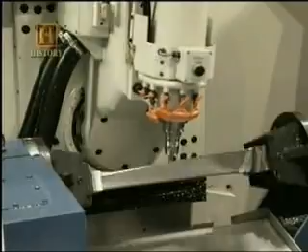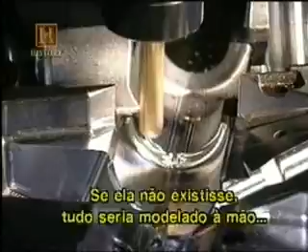It produces thousands of parts that go into the makeup of various items that we utilize every day. If there's no machine tool, everything would have to be shaped by hand, scraped, fitted, or filed into specific shape to fit into mating parts. All these inventions that came about in the late 19th, early 20th century might not have come about as easily as they did if it were not for machine tools.

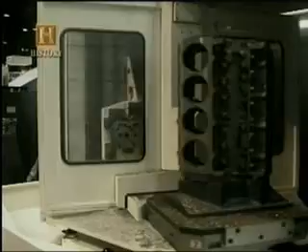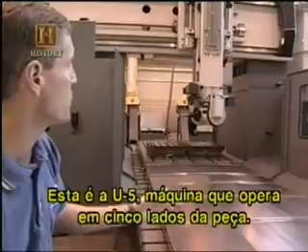What we do here in Cincinnati is we design, manufacture, and assemble all of our machine tools built in the United States. This particular machine is called the U5 because it can operate on 5 sides of a part. And these days, our customers, in trying to reduce setup, want to complete a part in one operation. Hence, they want to be able to operate on all 5 sides of the part. Typical customers of this kind of machine tool are tool and die manufacturers. The machine would come in and would actually shape the die, for example, in the shape of a door frame for a car.

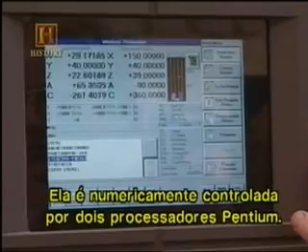There are 2 Pentium microprocessors running the computer that runs this computer numerical control machine. The computer directs all the operations of the machine tool. There might be up to 50,000 unique tool points all blended together in one motion. You can store literally hundreds of thousands of data points in a machine like this.

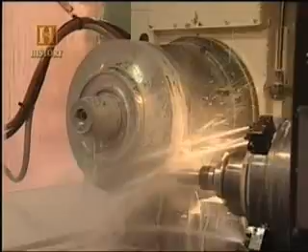It takes about 13 or 14 days straight just to mill this part. So this is probably as difficult as it gets.

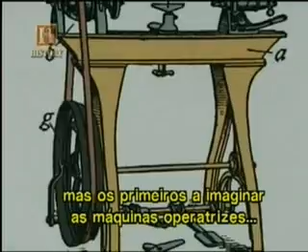We think that we are so far advanced today, and we are so clever and smart and have so much technology behind us, and yet the early people that devised the first machine tools really were very, very bright individuals. It was a by guess and by golly type of thing that eventually produced something of value. They didn't have the college degrees that are evident today, but by golly, they had a lot of ingenuity and they used it.

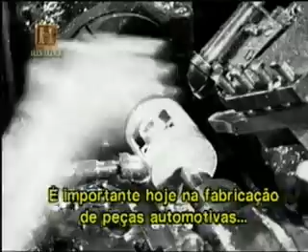The lathe is probably the most versatile machine and the most widely used of all the machine tools because so many things are cylindrical in nature, and its primary purpose is to cut metal down to a specific diameter. This is important if you're going to make an axle shaft, for instance, for a wagon so that the wagon wheel would fit on. It's important in the manufacture of any type of automobile parts, transmissions, engines. Virtually everything is basically cylindrical in nature, and this is turned on a lathe.

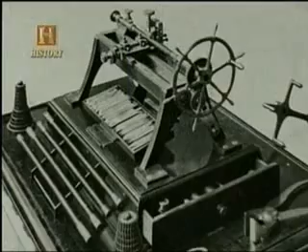He would put in essentially a pattern piece in the top of the machine, and the lathe would follow this pattern to create another identical gun stock in 20 to 25 minutes. It was this type of machining that they were going for, especially in the firearms industry, where you could pump out these pieces and then assemble them.

O torno sofreu algumas modificações, como as manivelas colocadas de um único lado para que os operadores não tivessem de se mover.

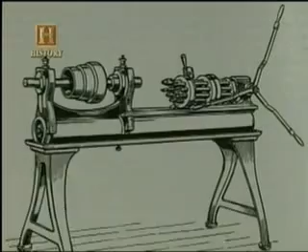Em 1845, Stephen Fitch, de Connecticut, criou o torno revólver, no qual várias ferramentas se revezam no processo de corte.

Em 1887, a R.K. LeBlond abriu uma filial em Cincinnati, cidade que ficaria famosa pela fabricação de máquinas operatrizes. Tempos depois, a LeBlond se tornou a maior fabricante de tornos do mundo.

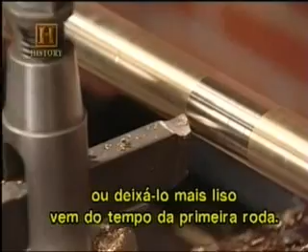This is a 1903 R.K. LeBlond lathe. It's manufactured here in Cincinnati. The lathe is the oldest form of all machine tools. The idea of actually turning an object to shape it into a round shape, or a smoother round shape, goes back millennia, even to the time of the first wheels.

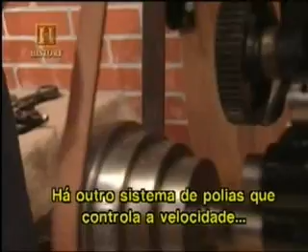Dois importantes aspectos do torno são a velocidade na qual a peça gira e a velocidade com que as ferramentas trabalham a peça. The speed of the lathe is controlled by the pulley size, which is set on the lathe itself. The smaller the pulley wheel that it's set on, the faster, the higher the RPMs. The larger, the slower. And there's another pulley wheel system which controls the feed rate, the rate that the tool moves either one direction or another on the stock that's being worked.

Mesmo com a passagem do vapor para o diesel e deste para a eletricidade, os tornos atuais se parecem muito com os modelos de 100 anos atrás. You can make a machine tool faster, you can make them more accurate, you can make them more precise, but the principles behind cutting, shaping, and finishing a piece of metal have remained the same.

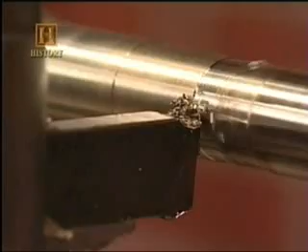Embora os princípios sejam os mesmos, o tamanho é diferente. O eixo de alguns tornos chega a ter 12 metros.

Em tempos de guerras mundiais, as máquinas operatrizes trabalharam a todo vapor. As far as the R.K. LeBlond Company is concerned, they had a tremendous role in World War I and World War II. They produced what we call a gun boring lathe for the various artillery pieces that were used throughout the war, the big howitzers.

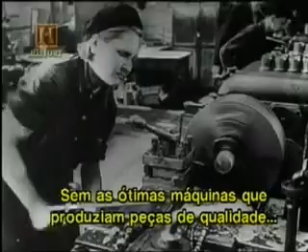Há quem pense que a América não teria vencido a Segunda Guerra sem as operatrizes. Without the quality of machines that we had, which produced quality parts, we never could have provided the war material for England, France, and the Australians, the Canadians. They all used American equipment. I think they made the difference between our winning the war or possibly losing the war. If we had not been able to supply virtually the rest of the world with the necessary war material, we might be saluting the Nazi flag today.

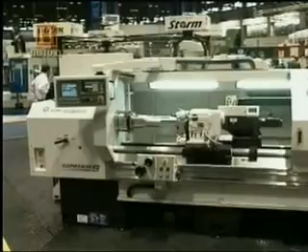Nos anos 60, os tornos ganharam a ajuda do computador e se transformaram nos centros mecânicos de hoje. Most modern turning machines are computer controlled. You have originally spindle speeds of 3,000 to 4,000 RPM. Now you're talking 20,000 to 30,000 RPM. Almost all the things that rely on motion from electric motors involve parts that spin, and most of those parts are produced on lathes and turning machines.

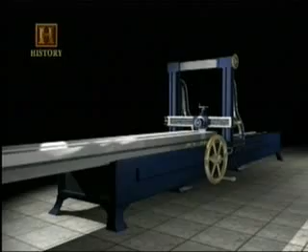Os tornos não foram criados isoladamente, já que outras operatrizes surgiram ao mesmo tempo. A plaina mecânica, por exemplo, foi uma das mais importantes operatrizes do seu tempo. Comparada à plaina de madeira, esta máquina serve para desbastar superfícies de metal. Há modelos em que a peça se move sob a ferramenta e outros em que a ferramenta se move sobre a peça.

Atribui-se a invenção da plaina mecânica em 1814 a James Fox, um mordomo que virou torneiro. Um dos modelos mais antigos se encontra na cidade de Windsor, Vermont, no museu que abriga a maior coleção de máquinas operatrizes do mundo.

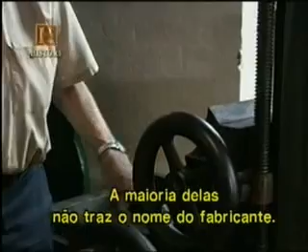Ed Battison é o fundador. Most of the early machine tools have no maker's name on them. They were made by the people that needed them rather than the people that were making a market out of selling them. We have an iron planer. It's operated entirely by hand, and it was made with a file. It was cast to rough shape and then filed up. You would make all the shapes you can't make on a lathe.

James Nasmyth era um inglês que trabalhava para Henry Maudslay, o inventor do torno de corte.

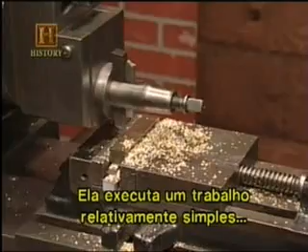This is a shaper from the American Tool Works, built in 1906 right here in Cincinnati. The shaper does a real basic type of job for people. It basically shapes a piece of stock. It goes through an enormous amount of movement just to perform this simple task, though.

Shapers can eliminate simple filing. It can also make keyways or notches for fitted pieces. As the stock is moved left or right, the cutting tool is moved back and forth. When the cutting tool moves to the home position or to the rear, the table moves over gradually, and then the cutting tool moves forward again and takes another bite off of the stock itself.

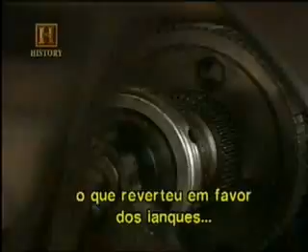After the Revolutionary War, a lot of the technology was banned from the United States in the same way that we have embargoes against Cuba or people would like embargoes against China today. If the political situation had changed, then the technology would have come in very freely. We were the up-and-coming Yankees. England often looked down upon the United States in the types of machines that they produced, that they were inferior. They weren't of the quality of the British machines. And in some respects, that's very true. We didn't produce the types of these large, sturdy machine tools that the British did, but in many respects that worked in our favor because the machine tool industry changed so rapidly in the 19th century that we could afford to build a little cheaper machines. Within 10 to 20 years, they were onto something new and different, and those machines were replaced. Whereas I think in many instances the British stayed with their old reliable machines, and we surpassed them.

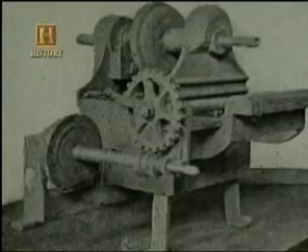I don't think they worried too much about whether somebody stole a patent or not, simply because communications aren't what they are today. I think that there is a tremendous amount of adaptation from one builder to another.

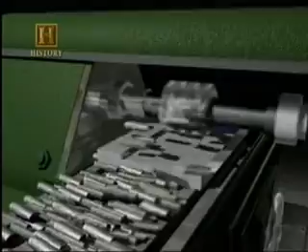The milling machine is pretty much the brains of the machine tool shop. It's used for making precise cuts. This one is a horizontal mill, or what's sometimes referred to as a slab mill. You can adjust the stock that you're working on any axis. This table is moving the stock against the rotating, sharpened steel tool. The steel tool basically chips away or scrapes away small particles of the metal. Any slab of metal that needed to be milled off to a uniform height would be milled on a horizontal mill like this.

Em 1878, a companhia Cincinnati Screw and Tap fabricou a primeira retífica de fresas e pouco depois se tornou a maior fabricante do mundo. A really big break for the company came just about the turn of the century with the advent of manufacturers of bicycles. And the bicycle parts, of course, are made of metal. And there was a need in the growing bicycle industry to have milling machines to make the components for bicycles.

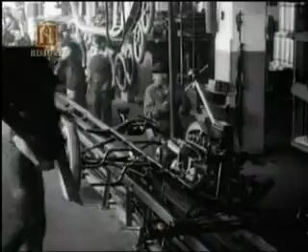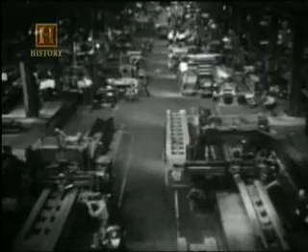The production of airplanes, or the production of jeeps, or the production of personnel carriers, or the production of tanks, or even the production of guns and arms, is all dependent on metal parts, mass-produced metal parts.

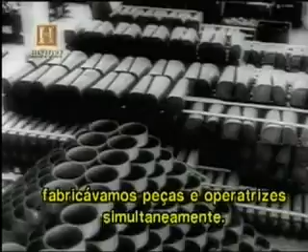In World War I, Cincinnati was very busy making basic machine tools, and we were making them for the factories that made war goods. In World War II, we were also extremely busy here making those same machine tools to support not just the U.S., but also the Allies during that period of time. And we were actually making components, portions of tanks, portions of personnel carriers, in the factory at the same time we were making machine tools.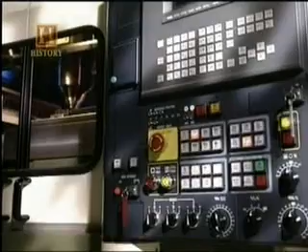Em poucas décadas, esta máquina alcançou níveis de precisão e força nunca antes imaginados. E evoluiu até chegar aos modernos centros mecânicos que executam múltiplas funções em uma única peça.

The precision with which you can make metal parts that fit together in a tight fashion is solely dependent on the precision accuracy capabilities of the machine tool that you use to make those parts. The more accurate the machine tool is, the more precisely you can control the dimensions of parts that ultimately mate together in an engine or in an aircraft or whatever the case may be.

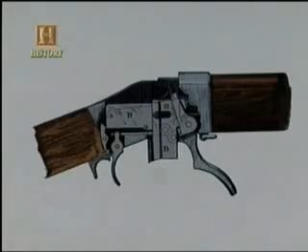Precisão e permutabilidade são conceitos bem definidos hoje. Mas antes da retífica de fresas, partes supostamente idênticas sempre apresentavam diferenças. O operador tinha de lixar as peças para formar um par. Mas Eli Whitney afirmava que sua máquina era tão precisa que as peças de uma arma poderiam ser trocadas por peças de outra. O conceito foi batizado de peças intercambiáveis.

E Thomas Jefferson aceitou a afirmação após examinar 10 fechos, embora muitos ainda achem que Whitney exagerou na permutabilidade das peças. They were terrible. Jefferson was an enthusiastic amateur, but there's a lot of things he didn't know.

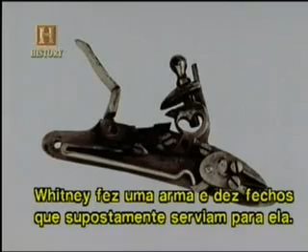And one thing he didn't know about was interchangeability. Whitney made one gun and 10 locks that supposedly would fit it. Well, that's easy enough to do if you spend time enough and money enough to do it, and he saved the contract that way. He fooled Jefferson and the War Department.

Mas o conceito de peças intercambiáveis chegou para ficar. Logo, muitos fabricantes de armas como Robbins e Lawrence, Springfield e Colt aceitaram a ideia.

A retífica de fresas trouxe uma nova precisão para os produtos criados. Mas não foi um feito exclusivo, já que outras 4 operatrizes tiveram um papel igualmente importante.

A perfuração é uma prática muito antiga e sua ferramenta mais rudimentar é o trado, bastante conhecido pelos escoteiros. Um dos primeiros avanços na perfuração surgiu com a broca de ponta torcida, que retirava as raspas do buraco.

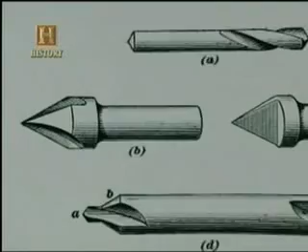A perfuratriz de Blacksmith foi um dos primeiros modelos contemporâneos. This is the post drill, and as with any tool, it eliminates a lot of work from your task.

Instead of having to push down on a drill that you might have had to push down with your shoulder and get maybe an inaccurate hole, the post drill mounts firmly and securely on a post in a shop, and then the power is kept constant when you're turning it by the flywheel.

Do volante manual à correia a vapor foi um passo. E logo todas as lojas vendiam a perfuratriz mecânica, o 4º tipo de máquina operatriz.

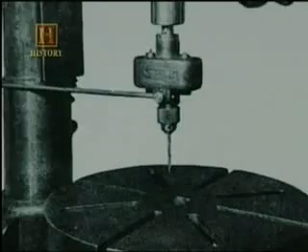Os avanços não se resumiam apenas na área mecânica, mas também no metal com que as brocas eram fabricadas. Apesar de rígido, o primeiro aço de ferro e carbono era quebradiço.

Em 1751, após a invenção do aço de cadinho, cuja liga é feita em uma caldeira fechada, as brocas ganharam resistência e perfuravam metais mais rígidos.

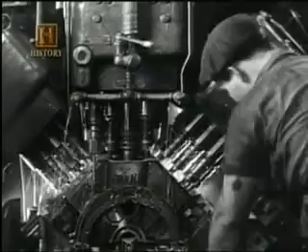No início do século XX, as perfuratrizes eram utilizadas na fabricação de máquinas de costura, bicicletas e relógios. As máquinas que faziam mais de 30 furos de uma vez eram utilizadas para fabricar motores.

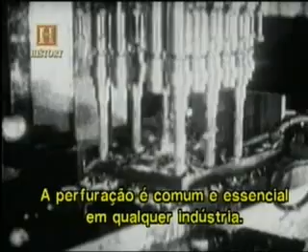Hole making happens to be the most common metalworking operation in industry. We make a lot of holes. Drilling machines come in all kinds of sizes because we make small holes, we make very large holes. Hole making is just so common that it's essential to manufacturing in almost every industry.

I think some of the most impressive drilling machines today are those designed for high-speed hole making. Typically, these drill at speeds that you can hardly see the hole making process. It's so fast. Certain workpieces require hundreds, even thousands of holes. So the faster those holes can be made, the more efficient the drilling machine has to be.

Os avanços do século XIX resultaram em melhores perfuratrizes e um novo tipo de operatriz, o esmeril. No século XVI, Leonardo da Vinci desenhou esboços de um amolador rudimentar. Por centenas de anos, o homem usou formas parecidas para afiar suas ferramentas.

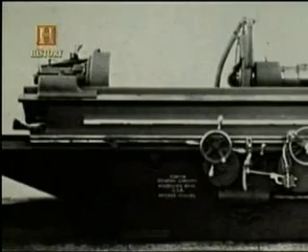Em 1837, James Nasmyth, o mesmo que inventou a plaina, patenteou o primeiro esmeril. Charles Norton foi um dos mais famosos fabricantes de esmeris. Quando a empresa Brown & Sharpe mostrou desinteresse em fabricar a peça em larga escala, Norton viu sua grande chance. Em 1903, ele criou o esmeril Norton, capaz de amolar o eixo de um automóvel em apenas 15 minutos, trabalho que antes levava 5 horas para ser feito. O sucesso foi imediato. Henry Ford encomendou 35 peças para sua fábrica.

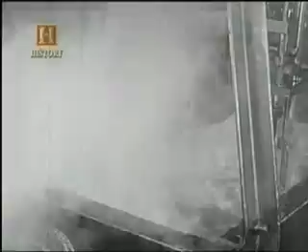O esmeril é indicado para trabalhos em metal pesado. Quando o aço é aquecido e esfriado em um processo que pode causar deformidades, o esmeril é uma das poucas ferramentas que podem trabalhar esta liga.

Grinding is generally a process that's applied when extreme accuracy is very important, because grinding can be highly controlled and it can be used to achieve levels of precision that would be impossible with other types of machine tools.

O esmeril é utilizado pela indústria aeroespacial para modelar metais como o titânio, o Inconel e o Hastelloy, ligas resistentes criadas para suportar altas temperaturas. O esmeril moderno é a mais precisa de todas as operatrizes, capaz de moldar uma peça de 1 milésimo de polegada.

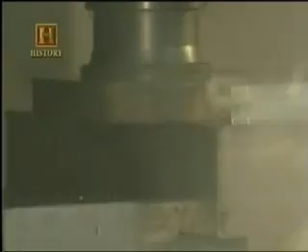Em meados do século XVIII, grande parte das fábricas utilizava a serra para cortar metal antes de ser trabalhado. No início do século seguinte, a invenção da serra de fita foi possível graças à flexibilidade do aço. A lâmina giratória também era flexível, mas resistente o bastante para não deformar.

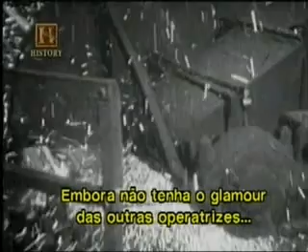Power saws are often the first machine tool that raw material is going to encounter, even though they may not have the same glamour that other types of machines have. They're still extremely important parts of the manufacturing process because they essentially create the workpieces that will go to other types of machine tools for complete manufacturing.

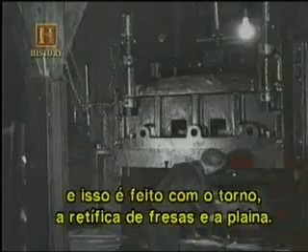A prensa de moldar, sétima e última categoria de operatrizes, não foi criada para cortar metal, mas para prensar e dar forma. Metalworking is broken down into two different types. One, you have the production of parts by the removal of metal in the form of chips, and that's what we do on a lathe, on a milling machine, on a planer. But then beyond that, you have a form of metalworking which is the forming of metal by pressure, so that you use a press then to form it against a die.

A prensa de moldar foi a última operatriz inventada. Um poderoso sistema de força vertical pressiona a máquina contra a base. A matéria é modelada em uma matriz de metal pesado que dá a forma específica à peça.

When I was young, my father wouldn't allow me to leave the car door open. I'd open the car for some reason and leave it hanging on the hinges. Nothing doing - that was a wooden body, and it didn't hold its shape, so you had to slam the door. But nowadays you can let the door hang all you want to - it's all steel body. And as the volume of cars went up, they started making the parts in presses instead of in woodworking shops.

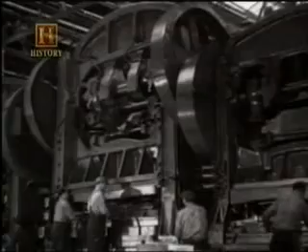Mais uma vez, a operatriz foi de grande importância durante as 2 guerras mundiais na fabricação de peças para tanques, jipes, munição e inúmeros itens bélicos. Hoje as prensas são mais complexas e precisas, moldando o metal na forma de objetos para todo tipo de utilização imaginável.

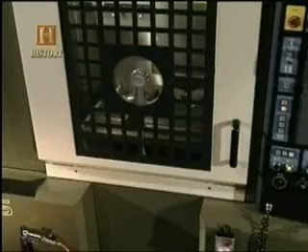A seguir, as máquinas operatrizes de última geração. As máquinas operatrizes são um legado da Revolução Industrial e desde os anos 60 seu design original vem sendo elevado a um novo nível de sofisticação.

As maiores mudanças ocorreram na parte de controle. A posição das ferramentas e a velocidade das máquinas eram controladas manualmente através de volantes. No início dos anos 50, os volantes passaram a ser controlados por cartões perfurados que acionavam uma sequência numérica exata.

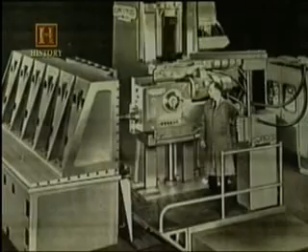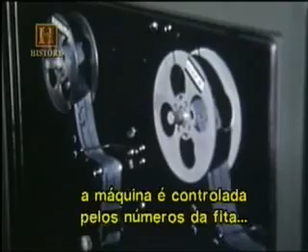The biggest change in machine tools occurred with the introduction of numerical control. That basically made it possible to automate the entire machining operation. Instead of relying on the operator turning hand wheels, the motion of the machine is directed by numbers read off a tape and then translated into corresponding motions that duplicate the shape the designer had in mind.

Everybody thought this was a great innovation where you had a paper tape that ran through a machine and you put your workpiece on. When machines became more automated, they would have one man to set the machine up and an operator who simply put the workpiece in, pushed the buttons to start the machine, took the workpiece out, put another workpiece in, and the responsibility was on the setup man.

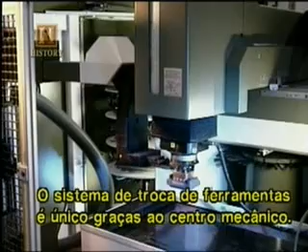The automatic tool change mechanisms are unique mostly to the machining centers. In the machining centers, they can utilize many tools, from a 40-tool magazine up to 400 and 500 tools in a magazine.

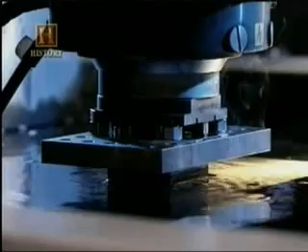They use the energy of a spark to essentially explode a microscopic bit of material away from the surface. This is microscopic, so it's something you can't see with the eye. But as that heat builds up to a certain point, at least as hot as the temperature of the sun, a small bubble of gas forms, and when that bubble of gas explodes, it blows away a microscopic bit of metal from the surface.

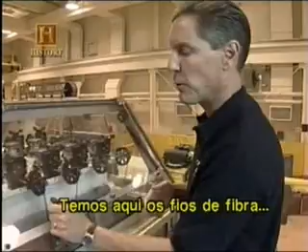This is the reverse process where we take the actual material, in this case fiber composite material, and we lay it and place it, building up the finished part for our customer. What I'll show you here is the actual fiber threads, fiber strands that are running through these 32 tows.

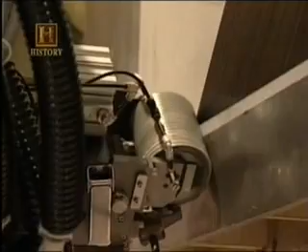I think that in the next 10 years, we will still see computer and communications technologies as the fundamental driver of innovation in the machine tool industry. It has been a driver for the last 20 years. We expect to see that knowledge start to become embodied in the machine tool itself, and it's the computer and the evolution of computer and motion control technology that's allowing that to happen.